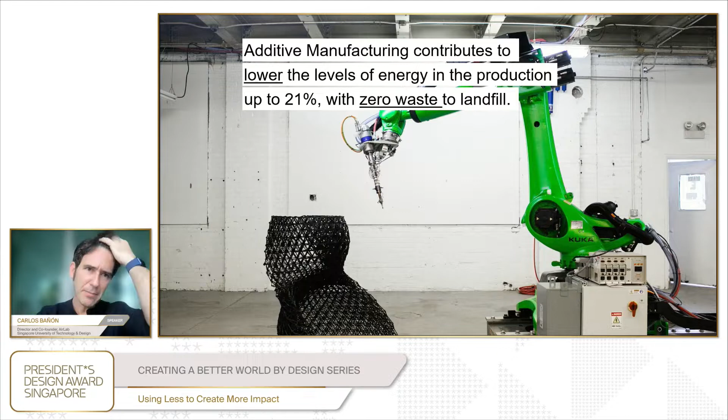Starting with this slide to portray the big problem that we have in the construction industry, that we create more than 20 million tons of construction waste every year. So one of the things that we do in AirLab is to look for new technologies that can lower the energy that we use in production, and also to create zero waste products, right? So we try to address sustainability from different sides. 3D printing is one of them. We really believe strongly in this technology. And also we look at the creation of more sustainable spaces using less resources and materials by placing it where it's actually needed.

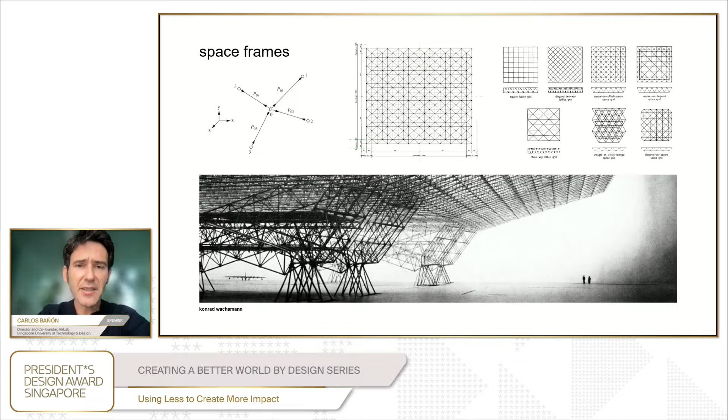So we started looking at the typology of the space frames. Actually, it's a very old typology. We have seen structures everywhere in the cities, like sports halls, many places in the world have this typology everywhere. It creates these regular grids, allows for a certain degree of flexibility. And this is the standard system. Basically, you have a node, and then you have bars connecting towards a node in standardized angles.

So we have this question. This is a well-proven technology that really works over time, and it allows for a certain degree of flexibility, but not a lot. Can we challenge that construction typology so that we can create more efficient structures? So with that vision in mind, we looked at what actually exists in the market and what could be the vision of the future of those structures that allows for free-form, geometric continuity, and extreme slenderness by spreading the load

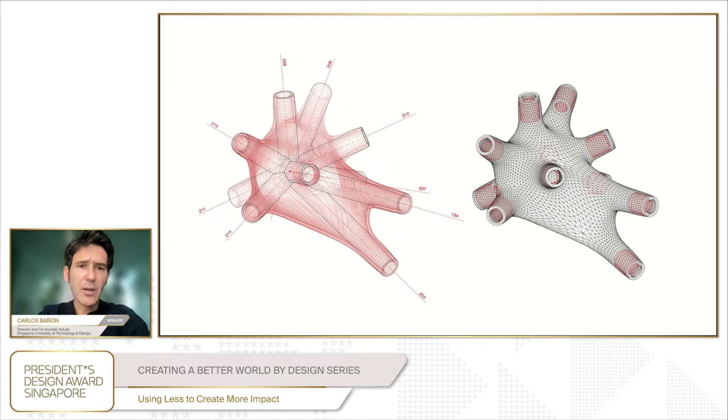in more slender components. So looking at nature as a source of inspiration, like looking at neural networks and their hyper redundancy and interconnectivity, we developed a concept whereby the nodes were generated by the forces that run through the system. So we 3D print a bespoke component that can integrate those components that actually are standard profiles. So we can create complex networks.

And then is when digital design takes place. To address that complexity, now we have the aid of tools, right? Tools are not the answer, but they're a means to really achieve certain goals. In this case, to reduce the material to the minimum and to achieve maximum freeform in our designs. So you can see here from the top left to the bottom right, the sequence that we use to generate the nodes

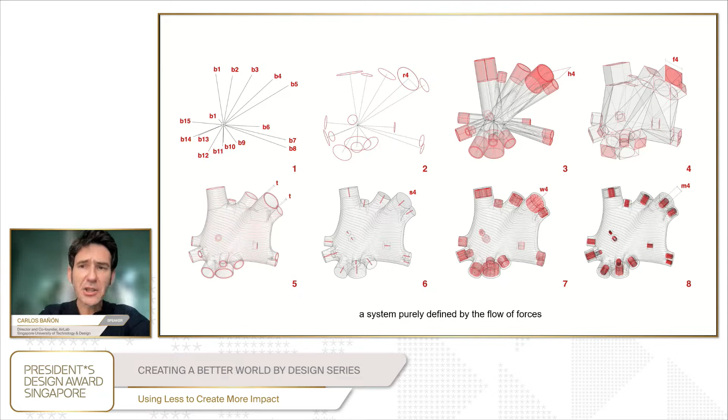from the forces and the vectors, we create the complex nodes for each of the points where we actually place the material. And the good thing here is that thanks to 3D printing, we can granularly decide where not to place the material, which is more important than where to place it, because we can decide where we are not putting material almost at the scale of the millimeter. So that allows us to really reduce the weight.

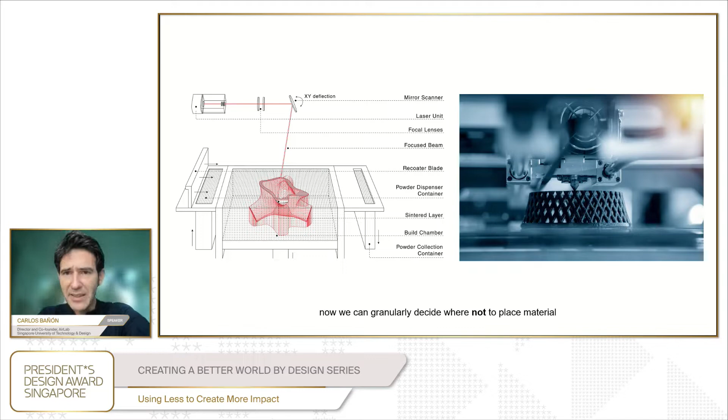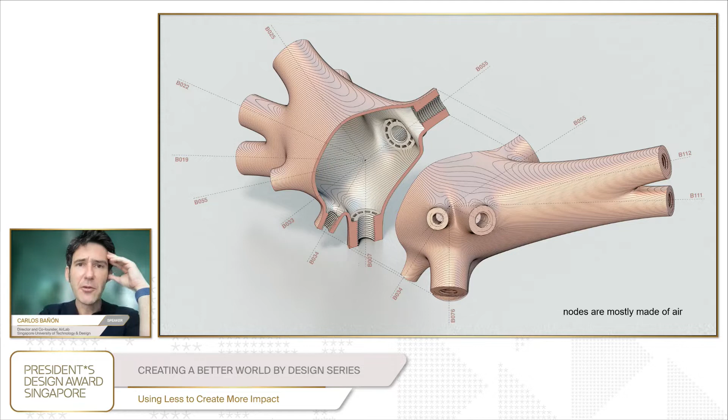So you can see one of the nodes that we developed for the AirMesh project. So I would say it's mostly made of air. The volume that you can see is actually 90% air. So we developed the connection system further.

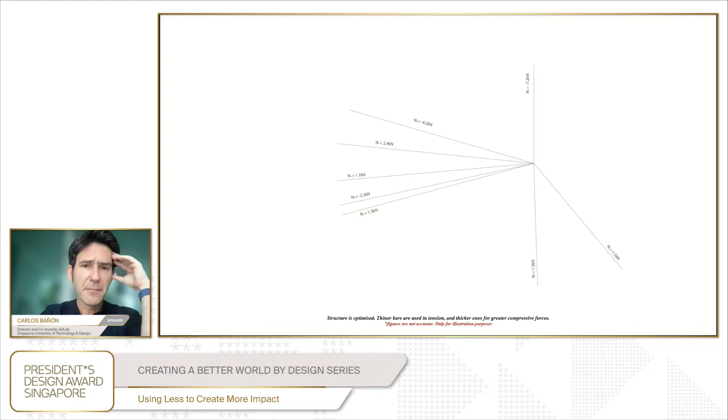So we develop the interface between the standard components and the 3D printed parts. We calculate the structure with finite element analysis, and we assign a section to the bars that actually defines the shape of the nodes. What you can see here is one of these nodes. This complex geometry is real-time generated with our script, so we can create a bespoke connection for each of the parts of the structure that can integrate the different bars with different profiles in the structure.

Creating a network-based complex, we can start with just 3 components, and we can actually add more as needed. The more we add, the more we can spread the load into thinner components, thinner parts, which allows for more flexibility and to spread the load more efficiently through the system. So instead of using a system of beams and columns, we're using this spatial network that addresses structures in a more efficient way. We wanted to achieve that geometric freedom, and that's why we developed the AirMesh Pavilion.

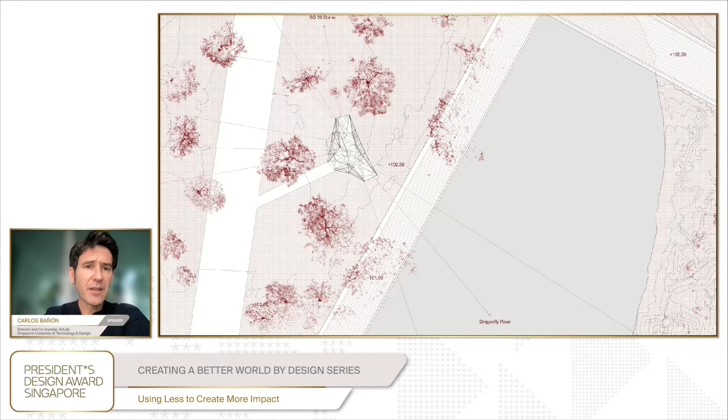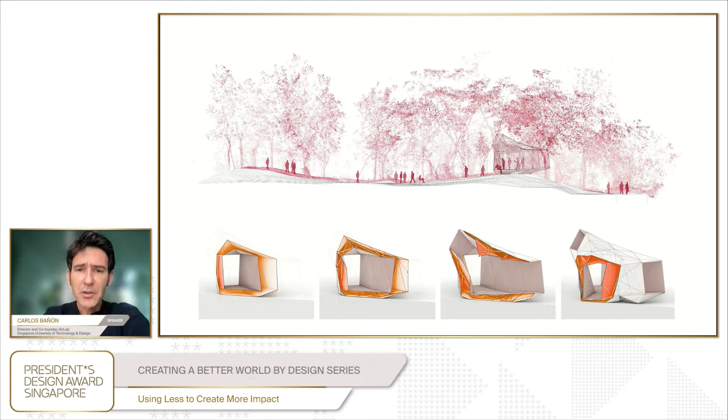The AirMesh Pavilion sits at the Gardens by the Bay. We look at the views as the way to define the geometry. We have 4 points, 3 landmarks and the access point, that define the geometry of the pavilion. It's quite straightforward: just the 4 vectors define the shape. You can see here the section, and below you can see the configuration. The spatial configuration is actually 2-layer. You create a volume so that the structure is more efficient.

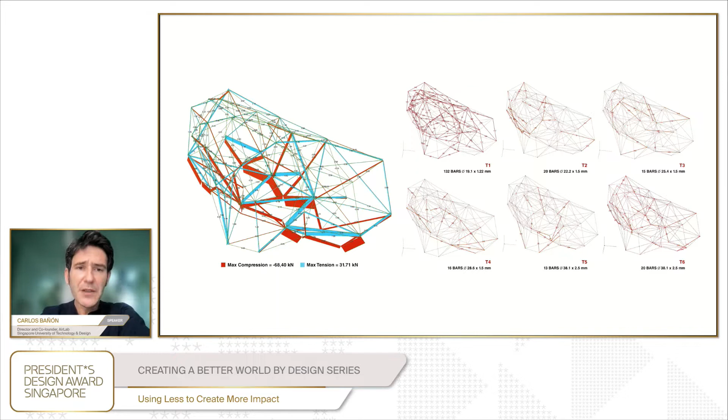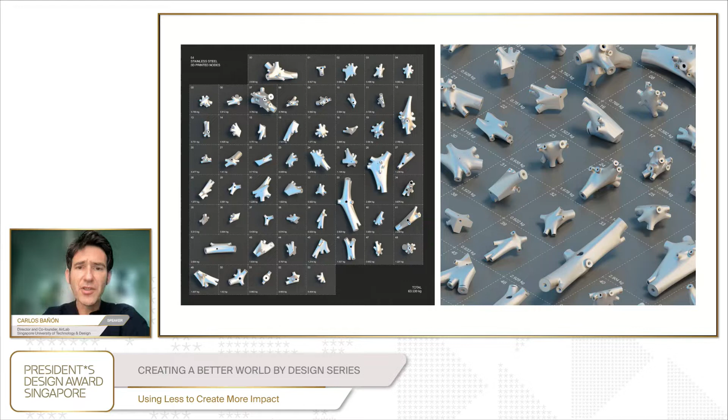It's made out of tetrahedrons, the most basic spatial structure that we have. The tetrahedrons are deformed and adapt to create any shape. That's done with our script, so we can discretize any geometry into tetrahedrons. We can build efficiently based on the forces running through the members. These 54 nodes are digitally created with our script. They are of different shapes, different proportions, different weights, and we use 3D printing to fabricate them.

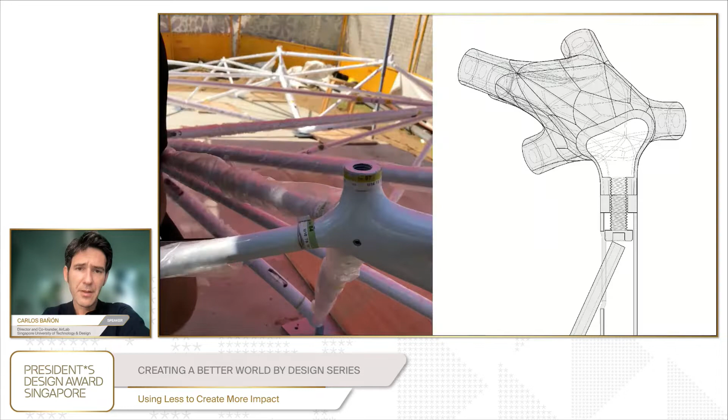This is the materiality of the pavilion. We have created this space that is still in Gardens by the Bay for the next few months. You can actually visit it close to the Bayfront Pavilion. It's just a space where you can sit down, you can chill, you can look at the views, you can experience lightness. And at night, you have very nice light effects thanks to LEDs strategically placed in the sides to create different nuances next to the lake at the Gardens by the Bay.

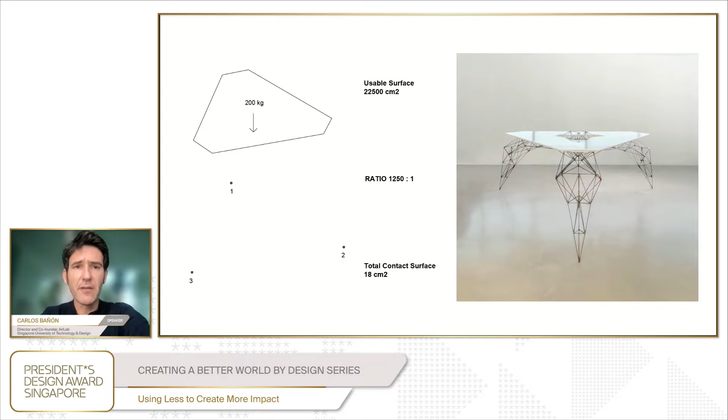Moving on, we also want to make more impact using reduced resources. We don't care about the scale or materials or production; we can tackle it throughout them. So we looked at a way to implement the system also at furniture scale. How to design a table that can transfer the load into just 3 minute points, smaller than, I don't know, a 50 cents coin. Can we transfer this 200 kg into 3 points? We used the AirMesh system to prove it right.

Those bars are extremely thin, like 6-millimeter diameter, and the precision is extreme, how they connect seamlessly between nodes and bars, and how they can create a complex network throughout them. You can see here the final result, how the table can withstand the surface load of a table, only touching in a very, very little surface.

We also explored that with bamboo, how to redefine traditional construction using 3D printing to reduce the utilization of resources, but also embrace the use of bamboo. This is actually a carbon sink and definitely can help us achieve sustainable designs.

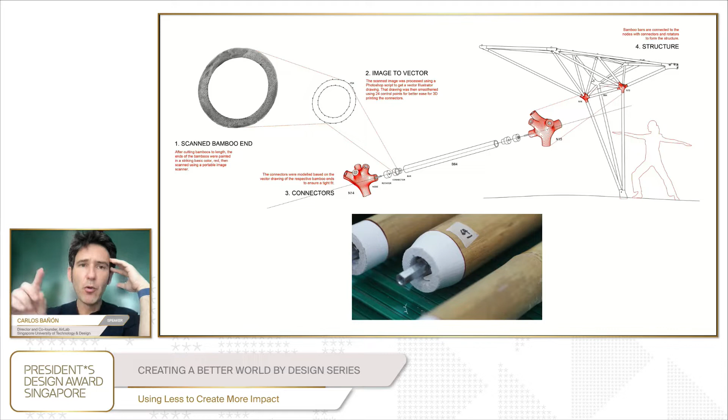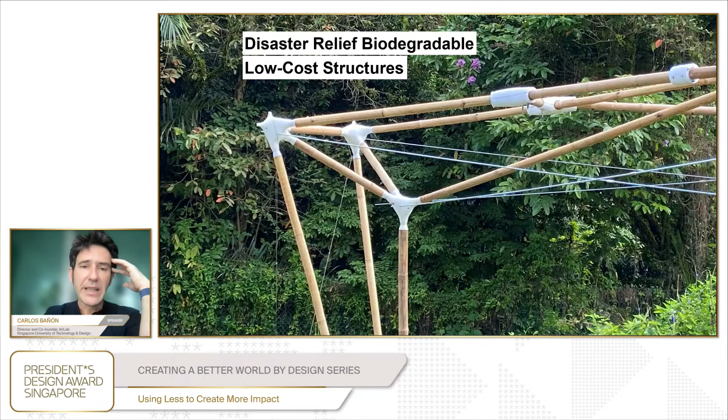The way that we did it this time was to scan the shape of the bamboo using 2D scanners and to 3D print a connector that fits exactly to the shape of each of the bamboo poles, because they're irregular. With that system, we can create a bespoke component in minutes, and we can interface the bamboo in a quite novel way, allowing us to create canopies or even disaster relief structures that can be deployed in just hours.

We have used the same technology as well for farming systems to create a 100% biodegradable A-frame system where, instead of the nodes, now we have the troughs, so we can grow plants there, and it's adapted to any geometry. We have tested that with our industry partner CDL, and we are actually scaling up to a larger scale really soon.

And lastly, I think we only have 10 minutes. So I want to conclude with just a small art piece that we finished recently that tackled the problem of waste. That is a huge problem. And now we're getting more and more requests from industry on how to address waste in designs. So now the briefs that we get as designers are very different than we had before. In this case, it's like, well, we have a lot of waste, and you guys as designers should try to do something with it, right? So we came up with this design for Chanel that I'm presenting here right now.

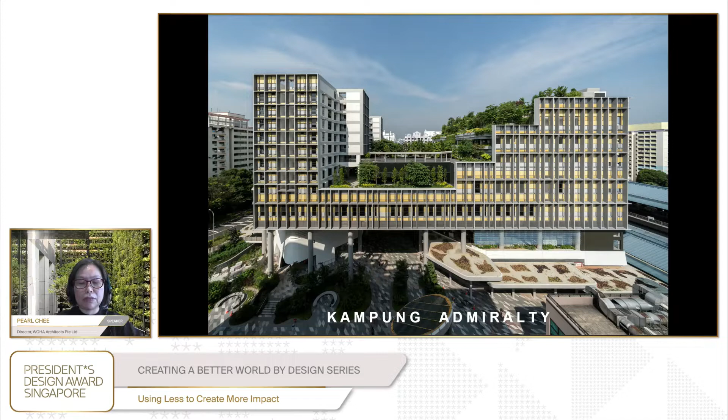I'm going to introduce Kampung Admiralty, this project, and the design ideas behind it. We were able to work on this project with multiple government agencies to come up with a new prototype to bring the Kampung spirit, which celebrates healthy communal living, into the urban setting of the 21st century. This prototype demonstrates an innovative mixed use that has potential to be adaptable and multiplied. And it shows how buildings can be urban infrastructure and ecosystem that improves the quality of greenery, community space, and biodiversity in cities.

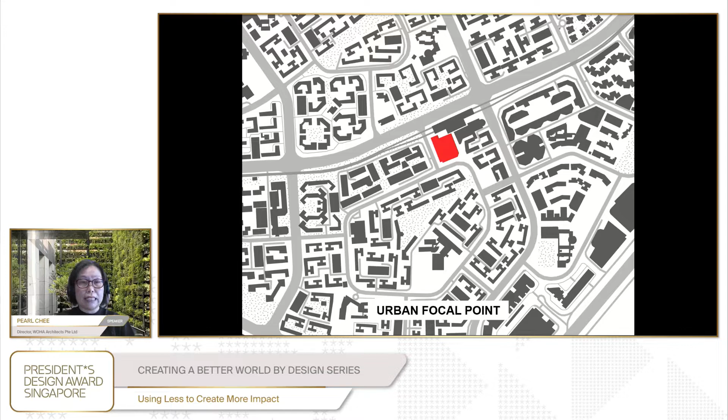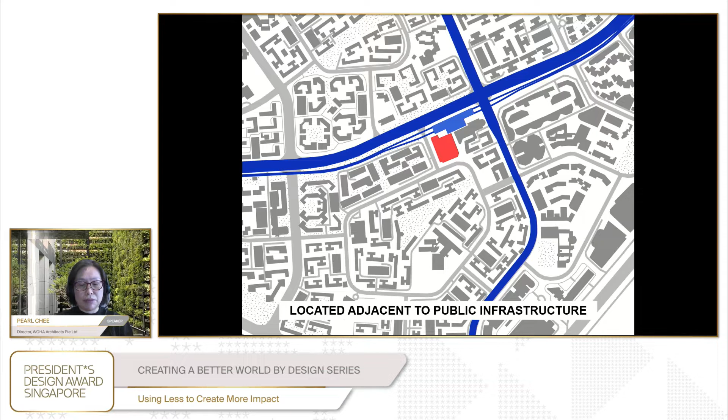The site is located next to the train station, a prime location in terms of real estate value. The building and its public space are connected to this public transport network and have become a natural urban focal point. The site is highlighted in red. It's in a mature housing estate in Singapore, which conventionally comprises residential blocks and a town center with standalone amenities. The site is next to the MRT station, highlighted in blue, and is also accessible by major arterial roads. Multiple existing pedestrian and cycling routes cut through it towards the train station and the park connectors. The site is chosen for its strategic location in a mature town.

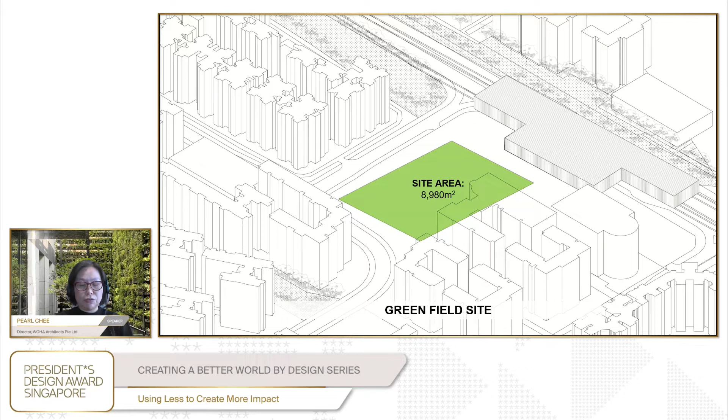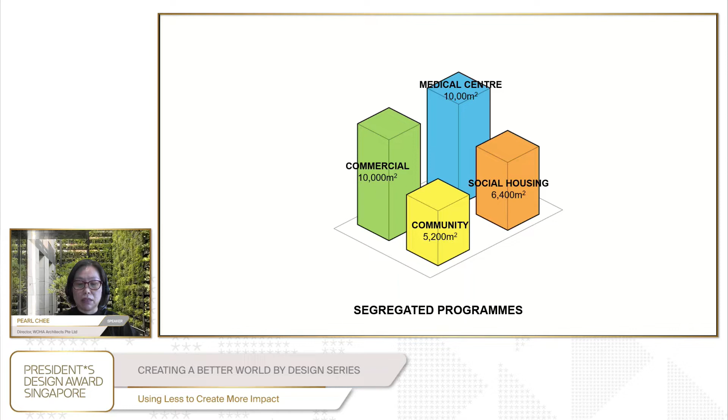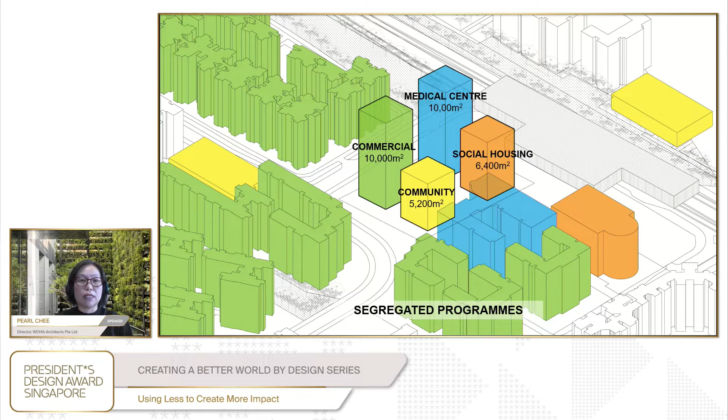So in the next few slides, I'll take you through a series of design diagrams to explain the layering of the different programs. The footprint of the site is about 9,000 square meters in area. And the project brief has 4 key components: commercial, medical center, community programs, and public housing for the elderly. These are facilities run by different government agencies, and co-locating them on this... the challenge we face is how to accommodate all the facilities in this very small site, which is slightly less than 1 hectare. We propose vertically stacking them up, which means many of the facilities could not be located on the ground floor. The challenge is to have a design that alleviates the concerns of the agencies and overcomes the site constraint.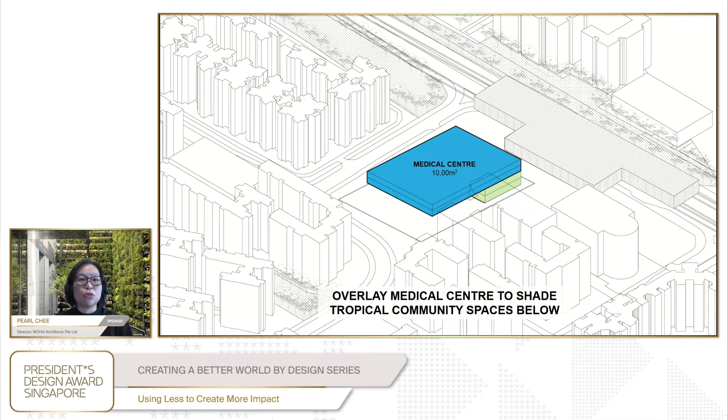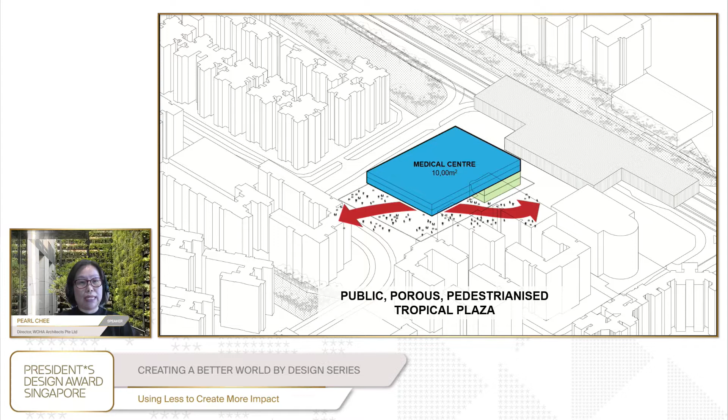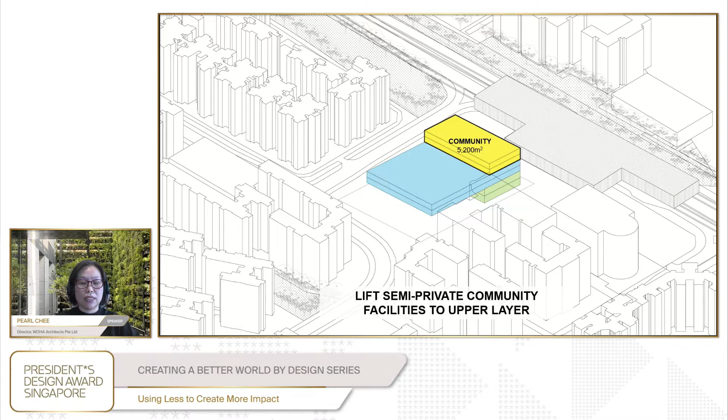By lifting the medical center to the mid-layer, all weather activities can now take place in a fully public, porous, and pedestrianized plaza below. The high volume also allows natural daylight and breezes through, ensuring a high degree of thermal comfort for people. The next key move was to overlay the community uses of a quieter nature, such as the childcare, elder care, and public housing to the upper layer.

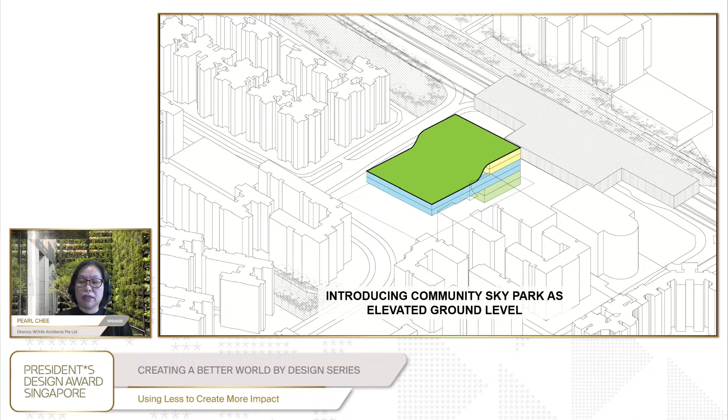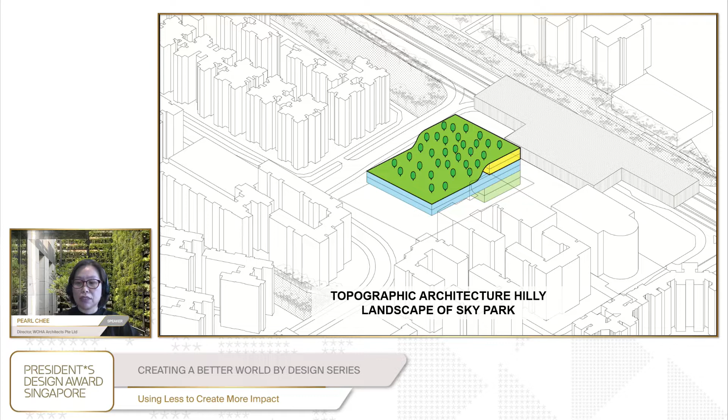And over this, a new elevated ground level was created by introducing a community sky park where young and old can come together. This community sky park with its gardens and urban farms adopts a topographical architectural language of terraces and hills. And at the foothill of the community sky park, we introduced the apartment blocks of the public housing for elderly, and the hills effectively shielded the apartments from the train noise, which is behind the building.

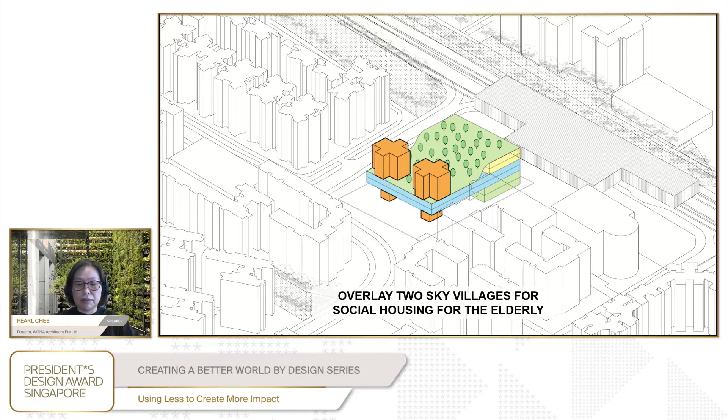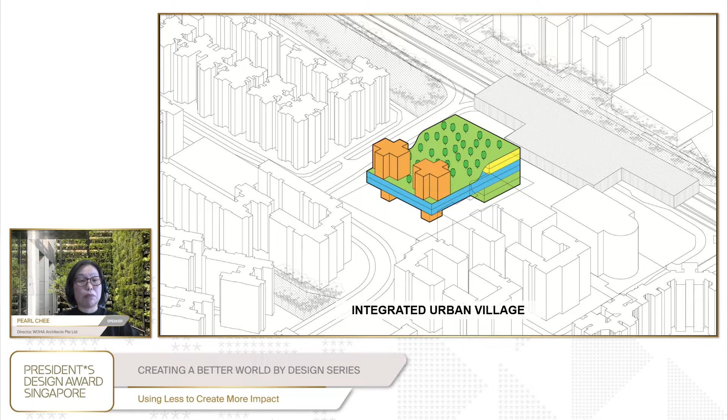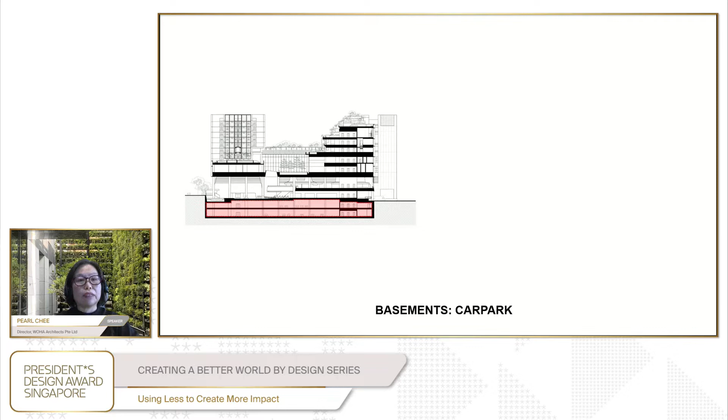So instead of a standalone program, it is now a layered integrated urban village. The freed ground level and new elevated ground level generate more horizontal surfaces for landscape and people as a result. Let's take a closer look at how we layered the program vertically through a section of the building complex. Here are 2 basements for car parking, which is below ground. And the lower layer of this building comprises 2 floors.

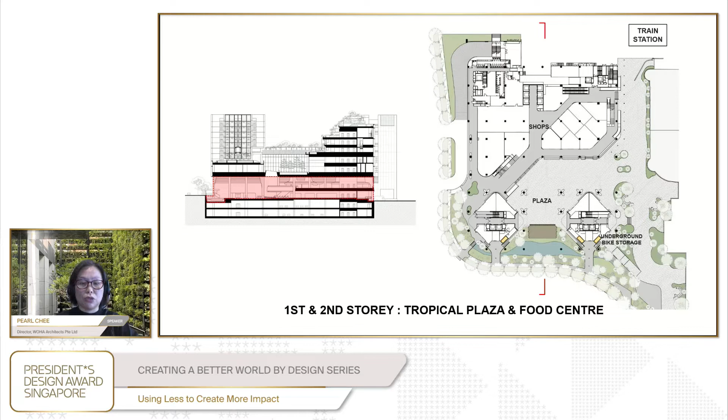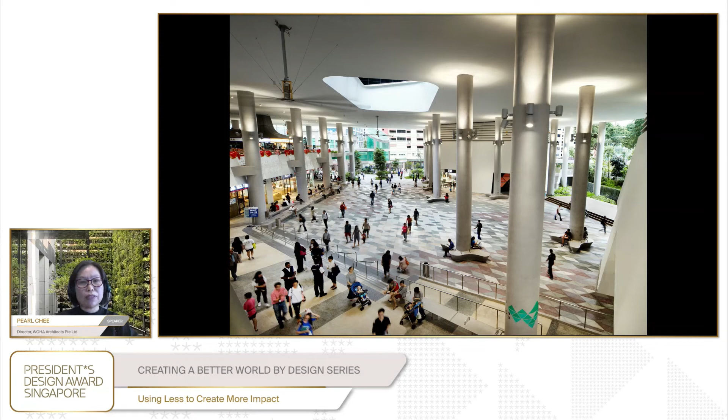The ground floor is a porous tropical plaza that brings the community together. The ground is designed to prioritize pedestrian circulation through the building to the train station. The plaza is a bright and breezy double volume space that serves as a community living room. It is activated by shops and a food center at the upper layer. And the oculus in the center opens up to light, air and views of the community sky park above. The plaza now is a popular social space and provides daily conveniences to residents.

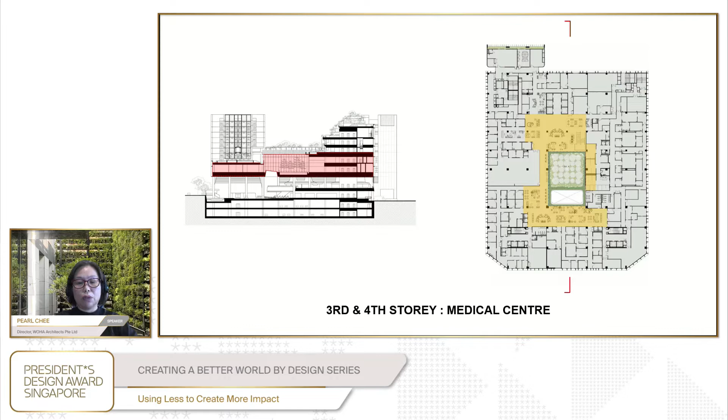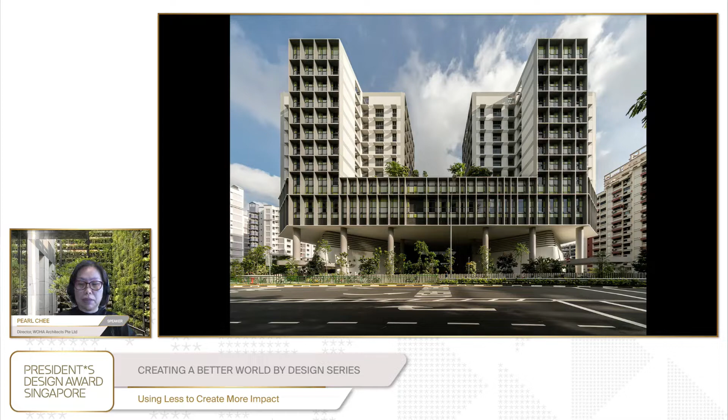Moving up to the mid layer, we spread the medical center over 2 floors. The footprint of the medical center covers almost the entire site, and all the internal waiting and circulation areas are organized around a center garden courtyard. Architecturally, the medical center is like an umbrella sheltering the plaza below, and it's also acting as a supporting floor for the landscape above. This is a view of the medical center.

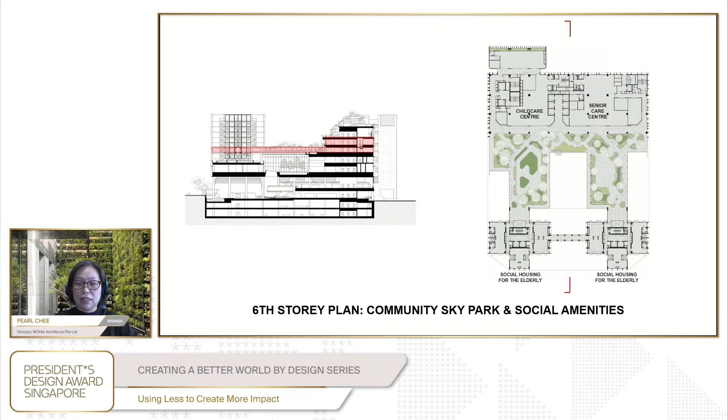The upper layer of the building comprises quieter, more private community facilities. The 6th-story floor plan is where the community sky park forms the new elevated ground level for childcare, elder care, and community gardens and playgrounds. The apartment windows actually open to a view of the community sky park. And childcare and elder care are side by side at this level and also adjacent to landscape outdoors. So this adjacency of program actually brings the young and old together, encouraging intergenerational bonding.

So they share the playground and outdoor exercise station. And while doing that, they could socialize with each other and at the same time take care of an urban community farm. So the idea of locating the farm on the rooftop encourages the elderly to be active. Of course, we have lifts and ramps provided to help persons using wheelchairs. This is the public housing block. It's 8 units per floor, and the units are modular and designed with barrier-free access.

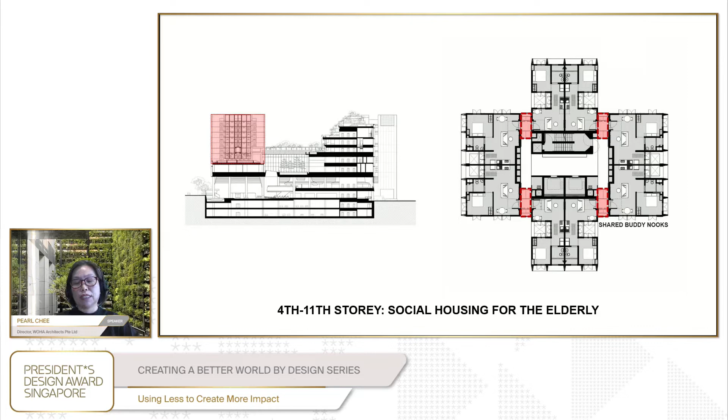They are arranged in pairs with buddy nooks at shared entrances for neighbors to sit, chat together and make friends. This is a view of the apartment blocks, sort of growing out of the park and surrounded by large landscape. The buddy nooks are benches designed to encourage interaction at shared entrances of each pair of apartments. So main doors are usually kept open for ventilation. In this case, it also helps neighbors to keep watch over each other.

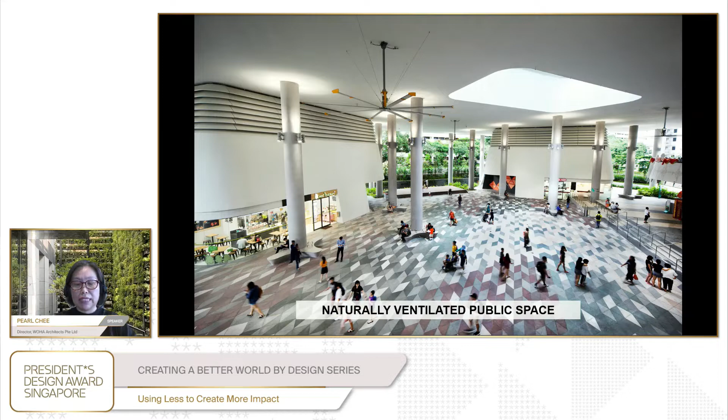For passive environmental strategies, we use them to achieve green performance for the building. So all the public spaces and apartments are designed for natural ventilation and hence not reliant on air conditioning. And on the precast facade, we created deep sunshades, also colorful to add visual orientation and interest. All the roof surfaces are landscaped, which is good for reducing thermal load.

Embracing landscape brings the benefit of being able to look out to greenery and being close to nature. In Kampong Admiralty, we have a planting palette that encourages biodiversity. The result is a good, healthy number of species of insects, birds, and fruit bats now. With a 0.9 hectare footprint, we actually have over 50 projected species, which is captured in our post-occupancy biodiversity survey.

The survey that we did was also extended to a nearby neighborhood park, and we compared the two. The park is almost the same site footprint as well, almost a hectare, but it has fewer projected species at 39. So it's 56 versus 39. Compared to a conventional neighborhood park, which is likely mostly hard landscape with little variation in planting palette, the landscape in this building performs far better in this biodiversity comparison.

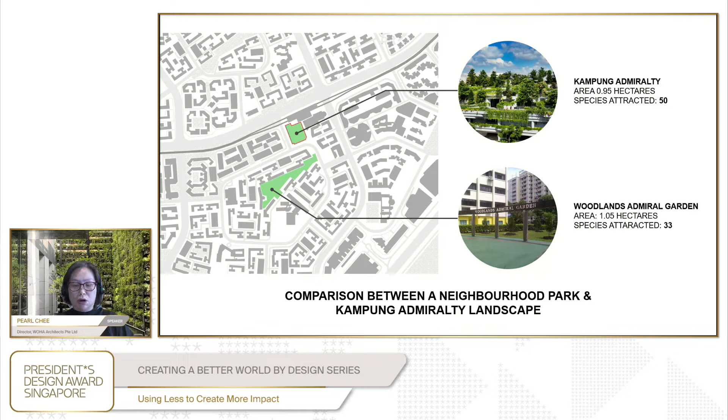So imagine if we have 10 of these more than 100% landscape replacement buildings, and we make connections between them, it's performing equivalent to a typical 10-hectare city neighborhood park. So this is the potential of the project as a prototype.

The approach in Kampung Admiralty is multiplying and maximizing the building system of greenery and community spaces, making the system both useful and enjoyable. These are calculations of what has been achieved in the building, which is 110% landscape replacement compared to site area and 150% community spaces. This building has been in use since 2017 and is inclusive and successful. And I'm happy to say that the government has also made plans to develop similar prototypes in other towns.

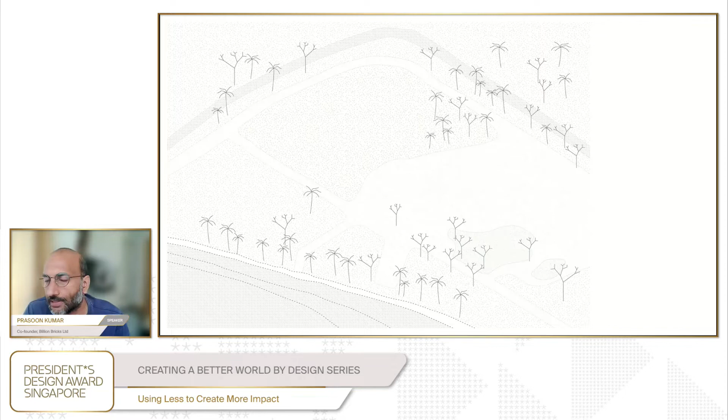So for us, it was a clean site. There were a couple of trees that we preserved on the site. We took a part of the land itself and created a mound out of it, which created one part of the structure, and we ensured that it is to the height of a shipping container. And then we built a couple of very light structures that you can see as columns to literally float the building on top of it.

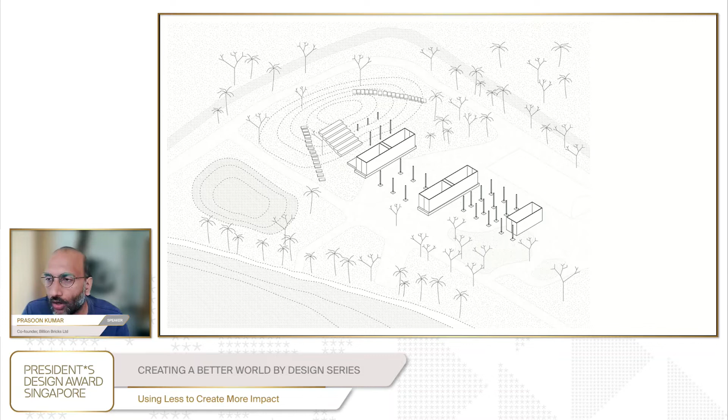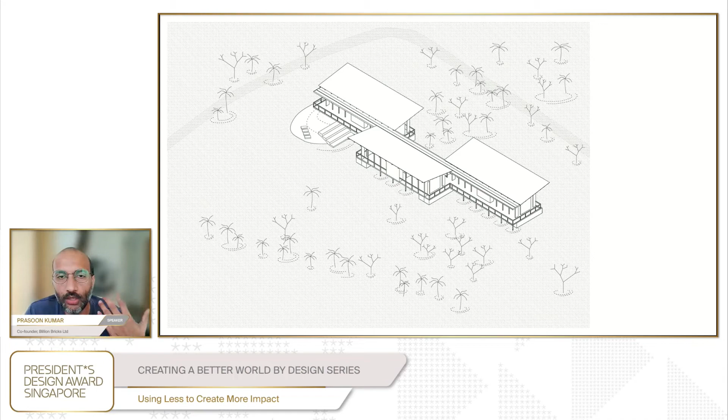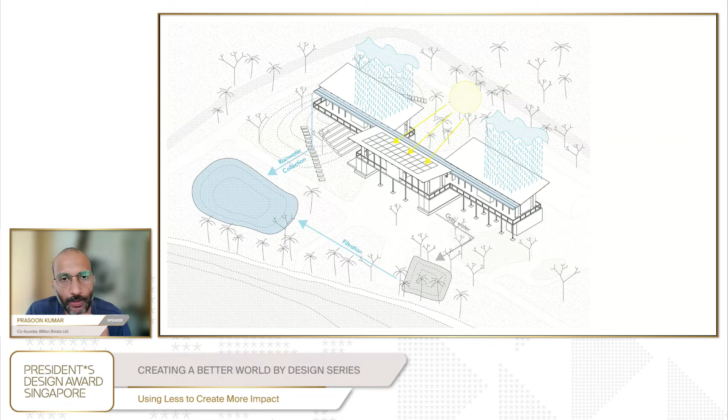The orientation was really where they can actually look into the river on one side, a very linear school with a corridor and rooms on either side. And then it could be extended as the school's needs grow. So this has about 5 classrooms in it. It was designed for rainwater harvesting and solar panels, so the entire energy is supplied by solar panels. There's rainwater collection, which happens in the pond that we created, and the sewage is cleaned up on the site as well.

So I think the interesting thing about the school is really the fact that the outside and inside, as you can see, are really one, right? I remember going there and speaking to teachers, and they said that at times they use the classrooms as the dance theaters, but they use the outside under the tree area as a classroom as well. So it's really a space for people to make on their own.